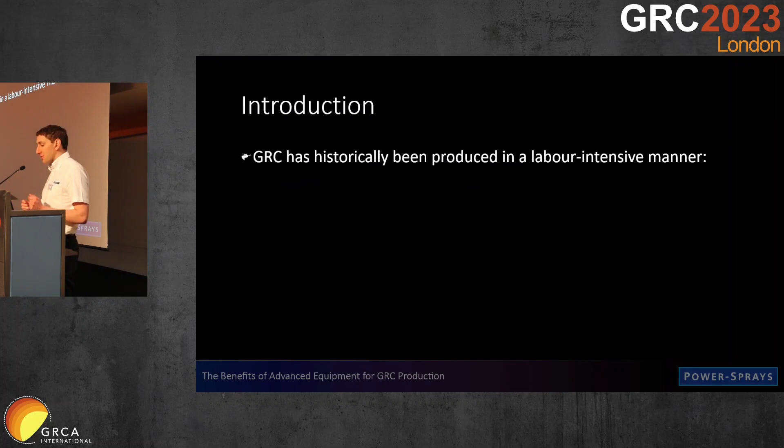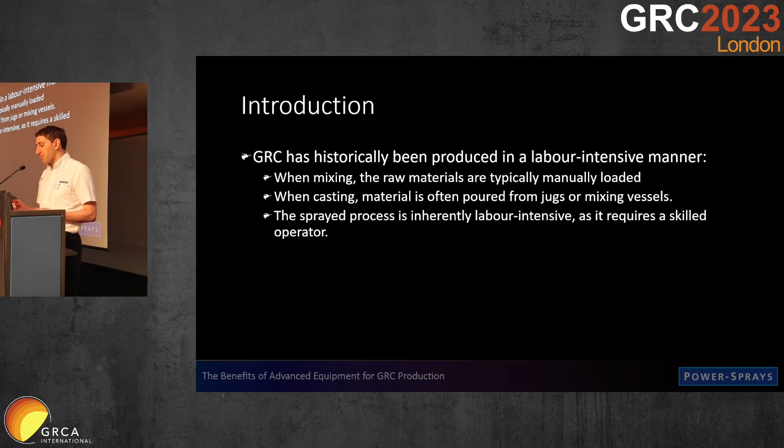So a brief introduction to the presentation. GRC has historically been produced in a fairly labour-intensive manner. When mixing, the raw materials are usually manually loaded. And when casting, the material can be poured from jugs or directly from the mixing vessel. As we know, the sprayed process is inherently labour-intensive, and it requires skilled operators, who in some countries are very expensive and difficult to get hold of.

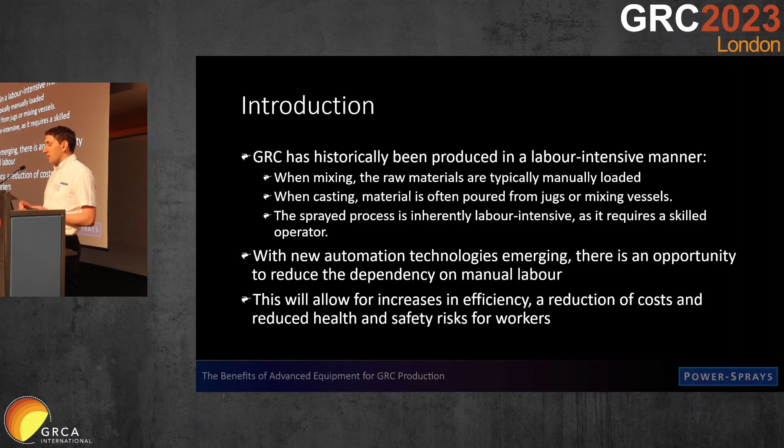But with new automation technologies emerging, there's now an opportunity to reduce the dependency on manual labour. Maybe not immediately, but looking to the future, it's getting better. It's getting better all the time. So this will allow for increases in efficiency, reduction of costs, and also reduced health and safety risks for workers.

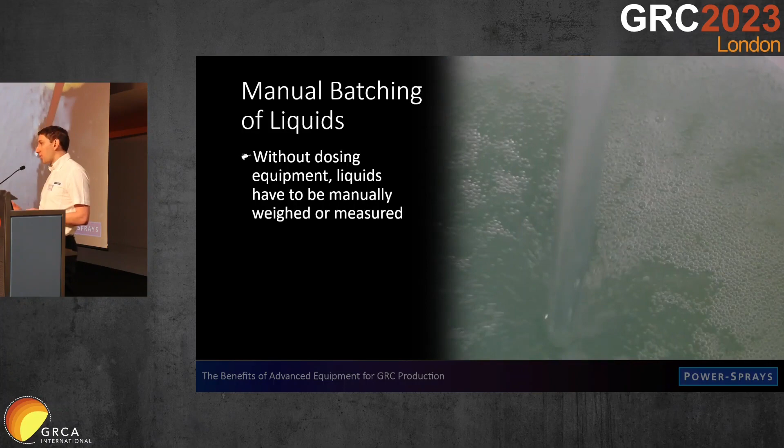So I want to talk about three topics. I'll try and be quick in the presentation. Batching of materials, automated quality control, and automated spray stations. So start with batching of materials. If you're doing it the old-fashioned way, without any dosing equipment, liquids have to be manually weighed or measured in a measuring cylinder or on scales. As you can imagine, this is pretty time-consuming, and more importantly, perhaps, is prone to human error.

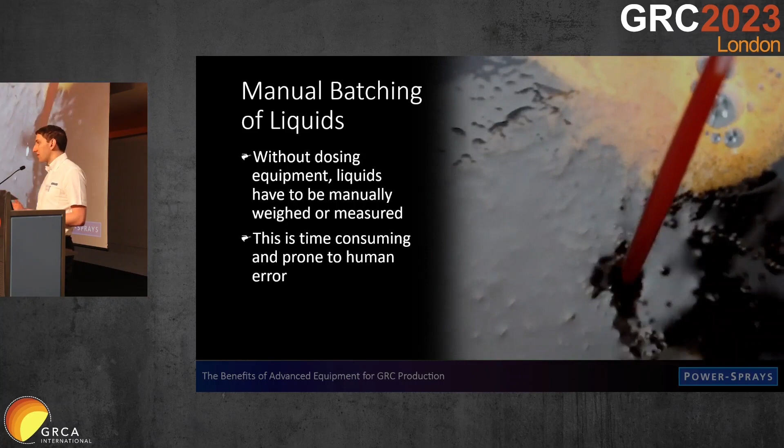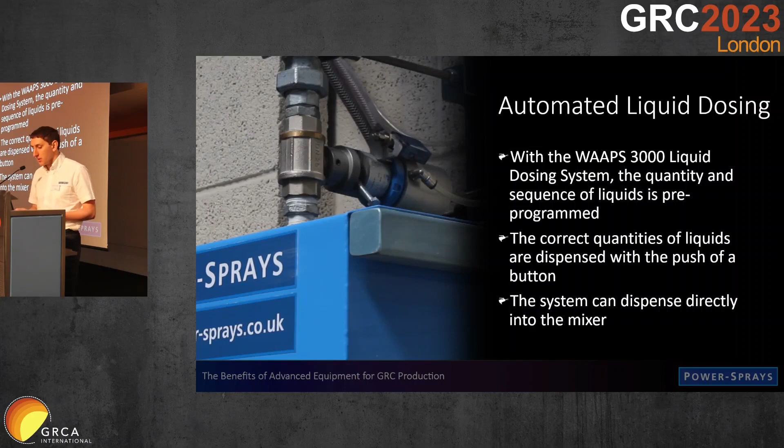So the alternative, automated liquid dosing. With a system such as our WAAPS 3000 dosing system, the quantity and the sequence of the liquids is pre-programmed. So, as you see in the video, you pre-program it with your up to 30 recipes, and with the push of a button, the liquids are dispensed either directly into the mixer or into a bucket. This system also has an automatic mode, where as soon as it's finished discharging the last mix, it will start weighing up the next.

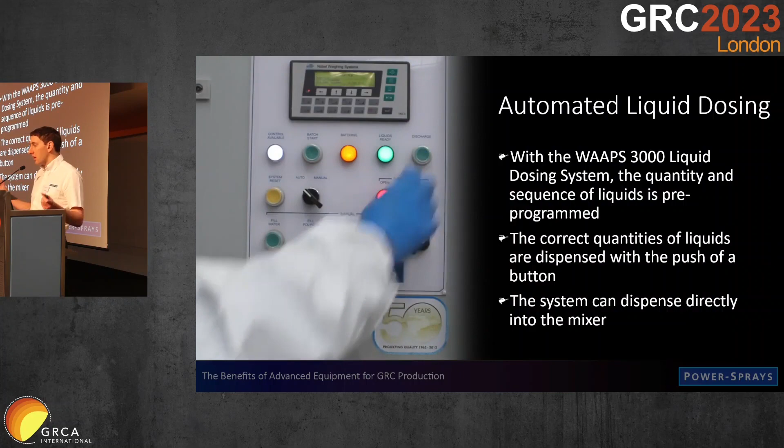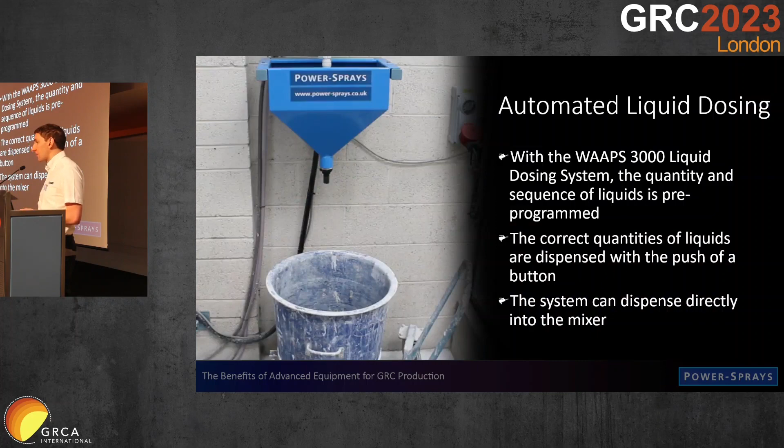So if you're there in a mixer, you hit discharge, you do your mix. When you finish that, giving it to the spray guys, there's already a mix waiting for you. You hit discharge, the liquids are there. So although the actual weighing time is something like 2 minutes for a typical batch of GRC, the mix time is just as long. So it's actually like 10 seconds. You hit discharge, 10 seconds later, you've got all your liquids.

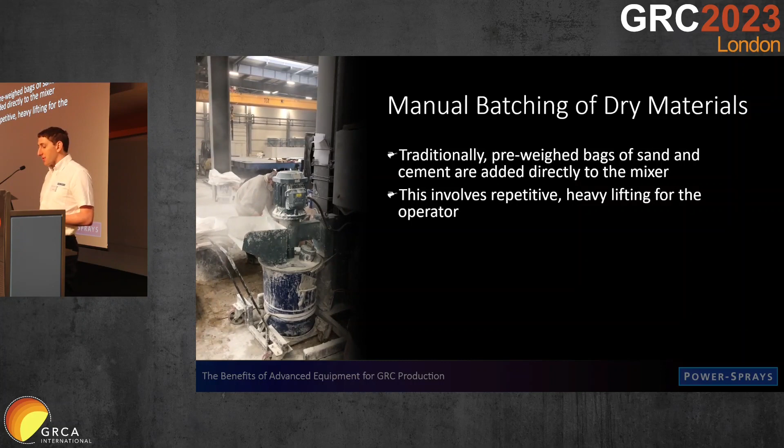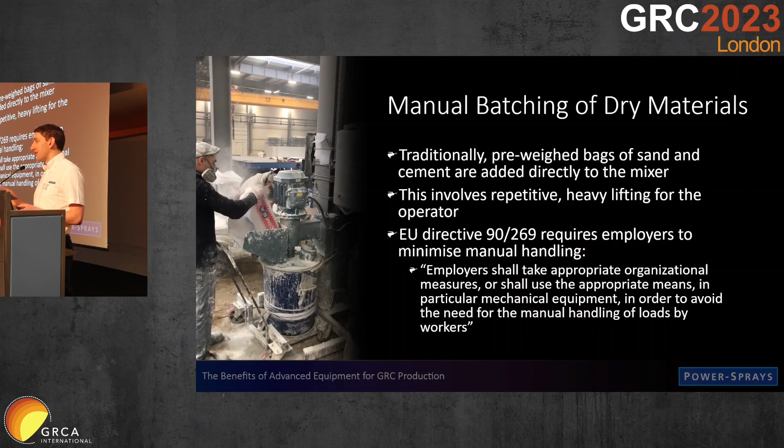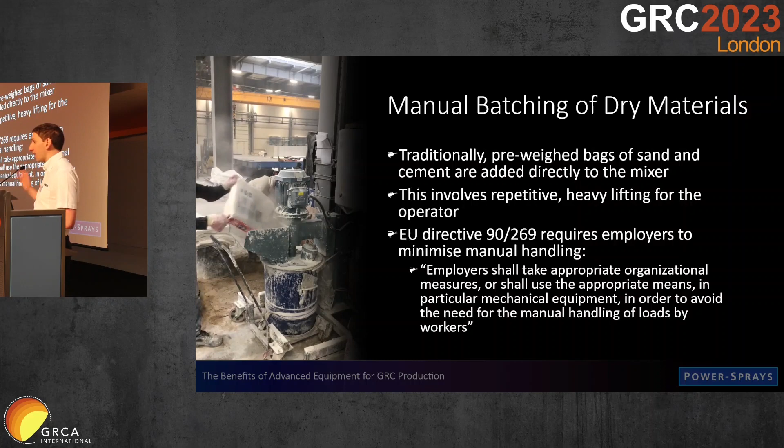So that's liquids. Onto dry materials. Traditionally, again, pre-weighed bags of sand and cement are added directly to the mixer. Obviously, our GRC125 mixer is pretty commonly used by hopefully a lot of you. But it involves repetitive heavy lifting for the operator. And there's an EU directive. I know a lot of you aren't in the EU, including me. But the EU wants us to minimize manual handling. I won't read it out, but the point is, do as little manual handling as possible. That's what they're after. And this is a directive, not something they're going to be prosecuting you over, but these laws are only getting stricter and stricter, and they start in the EU and they spread worldwide.

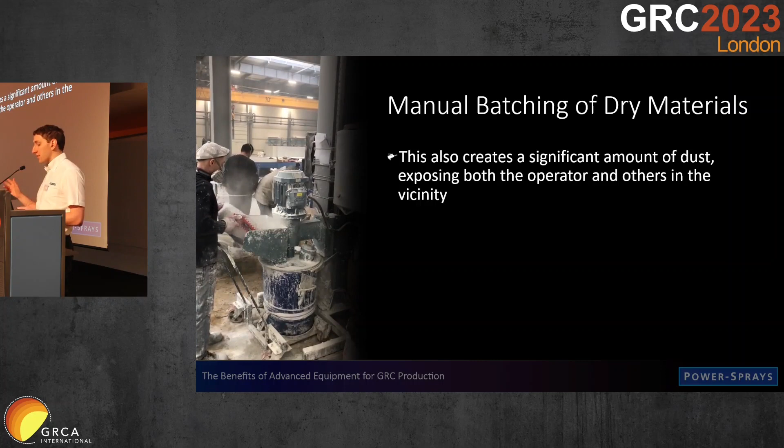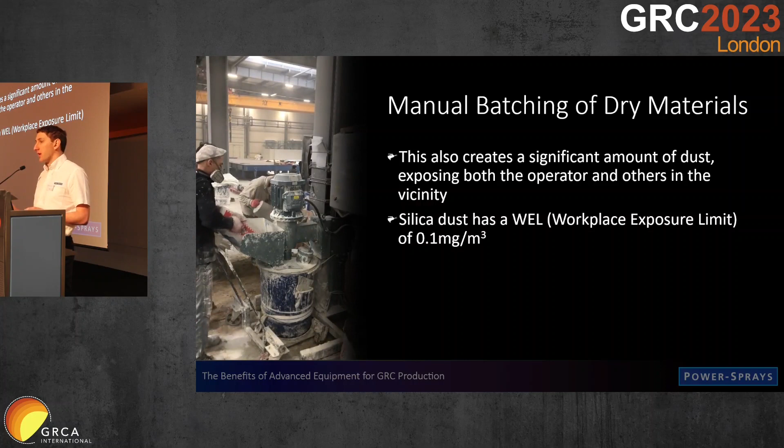The other problem with manual batching of dry materials is, of course, it creates a lot of dust, which exposes both the operator and others in the vicinity. Again, I don't have the references, but laws around respirable silica dust are just getting stricter and stricter. It has a workplace exposure limit of 0.1 milligrams per cubic meter, which means during an 8-hour period, a worker shouldn't inhale more than this much dust. Now, obviously, as you see in this video, it can be managed if they're wearing proper masks. But again, it's the same as the heavy lifting. The laws are only going to get stricter. So it's something to be aware of and to consider.

An additional issue with manual batching of dry materials, not an issue, but a cost, is you have to get all the dry materials right next to the mixer before they can be loaded. So you might have a guy on a forklift spending half his time literally just moving sand and cement backwards and forwards around the factory.

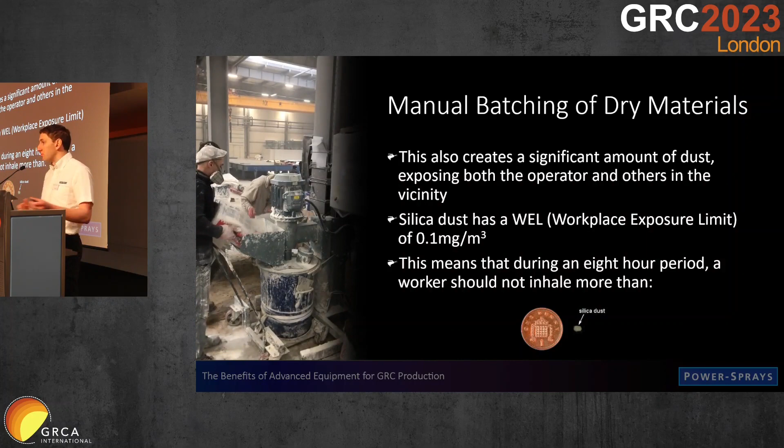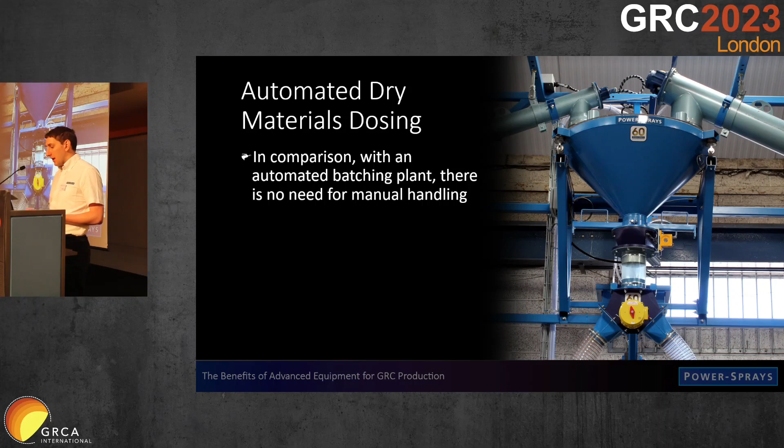So the solution is an automated dry materials system where there's no need for manual handling. In such a system, all the dry materials are loaded via screw conveyors, and the outlets of the conveyors are sealed to the weigh hopper. So I'll briefly just show you on here what each piece is. This here shows a screw conveyor for cement, and it's connected to either a big bag or potentially a hopper, but for cement, a big bag is usually better. This is a screw conveyor for sand. So they're both loaded into this weigh hopper, which is mounted on load cells, connected to the control system.

Similar to the liquid system, the system weighs everything up, and then it gives you a little light to say the materials are ready. When you want to go, this is the valve, the discharge valve for dispensing the materials, and our system controls it so that it opens and closes rapidly, and it mimics the dry materials the way you would do it manually. You don't want 25, 50 kilos of stuff to just dump into the mixer, because it's going to trip the mixer. It's going to require too much torque.

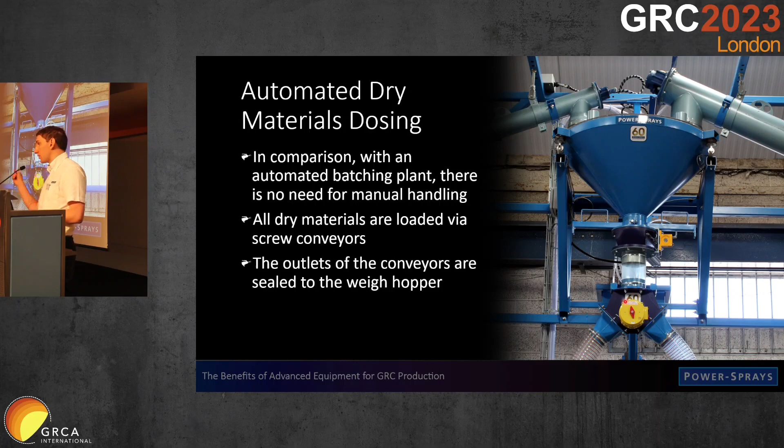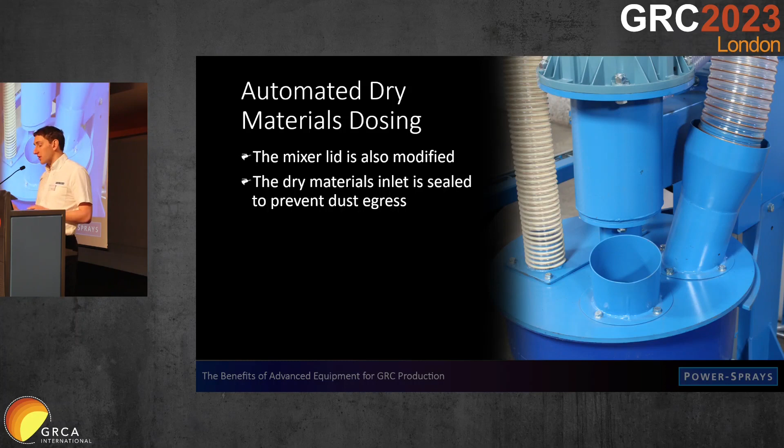And then just below that, we have the diverter valve, so that you can choose whether it goes to mixer 1 or mixer 2. And I'll just show the mixer lid in such a system also needs to be modified. The benefit of this is the dry materials inlet is sealed to prevent dust egress, and it also incorporates a vent tube to just keep the dust all within the system, not allow it to escape.

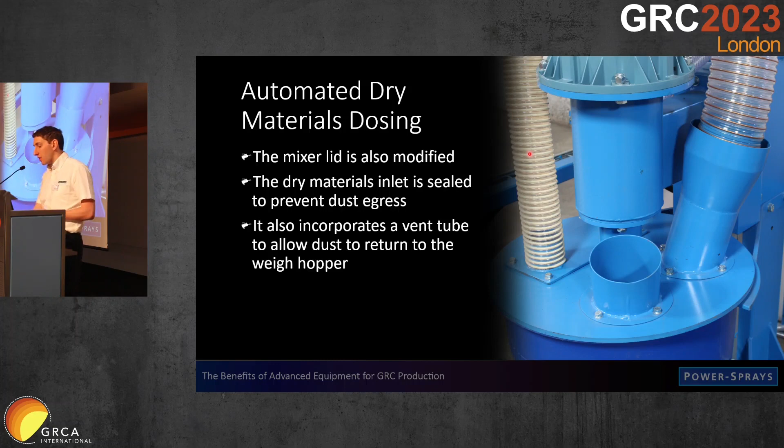Oh, beg your pardon, I've gone too fast. Again, I'll just show you. So this is the inlet for the dry materials. Just behind the shaft here is the inlet for the liquids, and this is the vent tube. So this duct leads back up to the weigh hopper. So any dust that's generated during mixing or during the loading of the mixer, it's got nowhere to go but back into the weigh hopper, so nothing escapes into the environment. This here is just an inspection hatch.

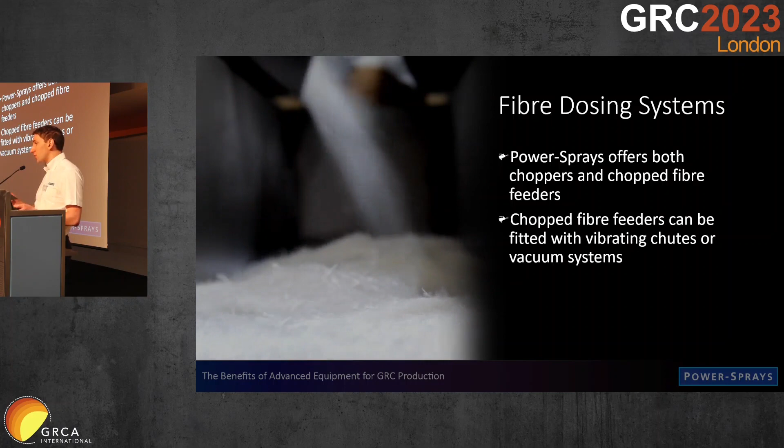So as well as liquids and dry materials, we also offer choppers and chopped fibre feeders. The fibre feeders are probably the most useful, actually, and can be fitted with vibrating chutes or vacuum systems to move the fibre anywhere in the factory within reason. And they can also be integrated into batching plants. We design these systems around glass fibre for obvious reasons, but they can also be used for chopped polypropylene and some other synthetic fibres. And we've got a lot of these now in concrete batching plants.

In particular, polypropylene, I'm not sure how many people are aware of it, it's used in tunnel lining for fire resistance. So HS2, recently we've got a fibre dispenser installed in Avonmouth, actually. They're making tunnel lining. Oh, I should explain for people who aren't British, apologies. So HS2 is our very controversial high-speed rail line. It's going right through the middle of the country. It needs a lot of tunnels to avoid roads and farmland and what have you. And a huge amount of tunnel lining, and it's all got polypropylene in for this fire resistance. So one of our machines is there for that.

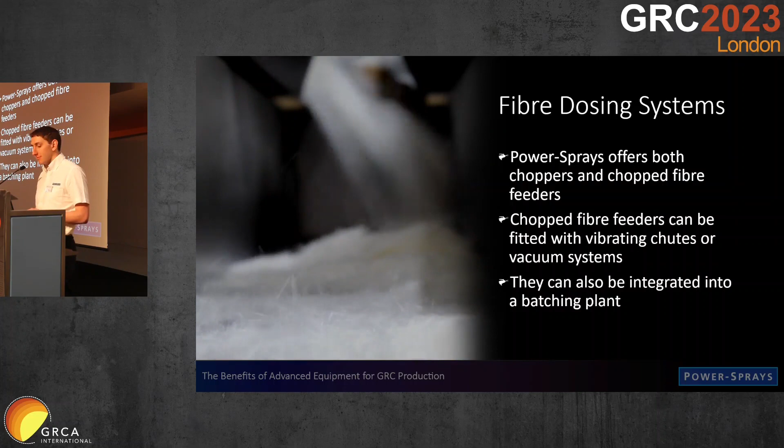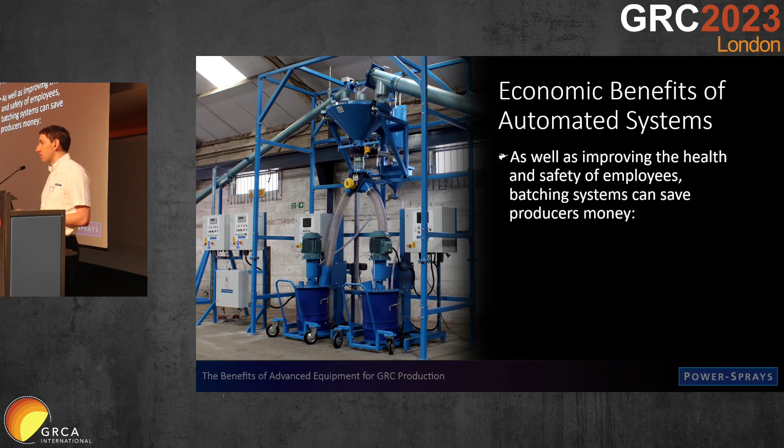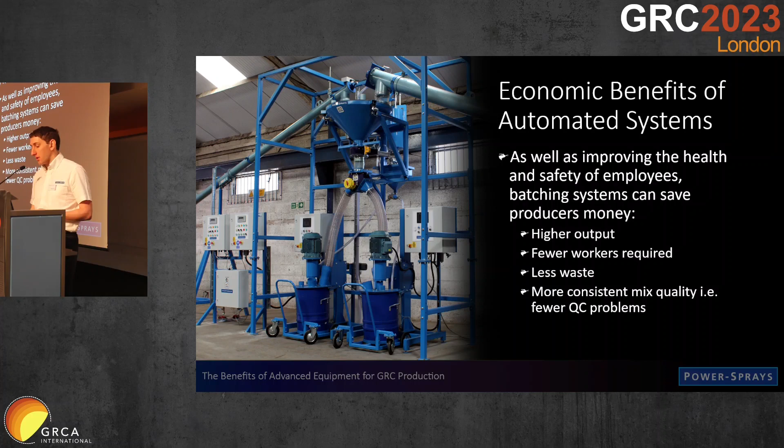So apart from the health and safety benefits and that sort of thing, there are also economic benefits of automated systems. It can save you money. With these types of systems, you'll have a higher output, fewer workers are needed, there's less waste, and there's more consistent mix quality, so fewer quality control issues. We recently installed a batching plant a couple of years ago, and the customer carried out an analysis before and after they had the plant, and they found there was an increase in output of over 40%.

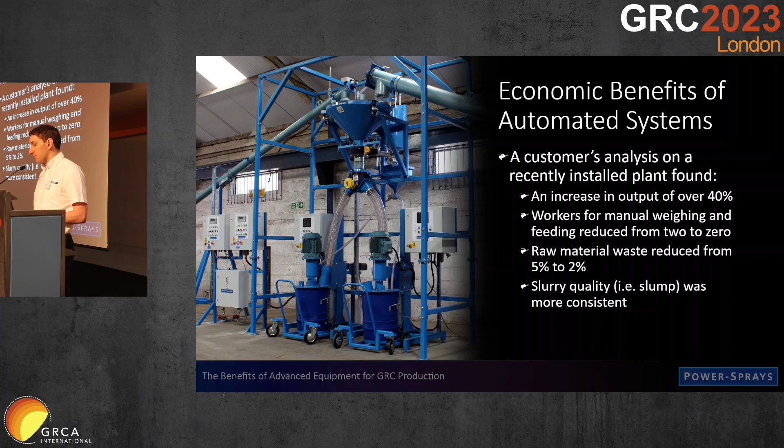The workers they needed for manually weighing and feeding the mixer was reduced from 2 to 0, pretty significant reduction. And the raw material waste was reduced from 5% to 2%. In addition, the slurry quality, as I said, was more consistent, and they seem to think that saved them almost a whole person, having to just check everything all the time. So based on this and our own sort of data that we have from other customers, I've very roughly calculated the payback period for a typical batching plant, although there's no such thing as a typical batching plant.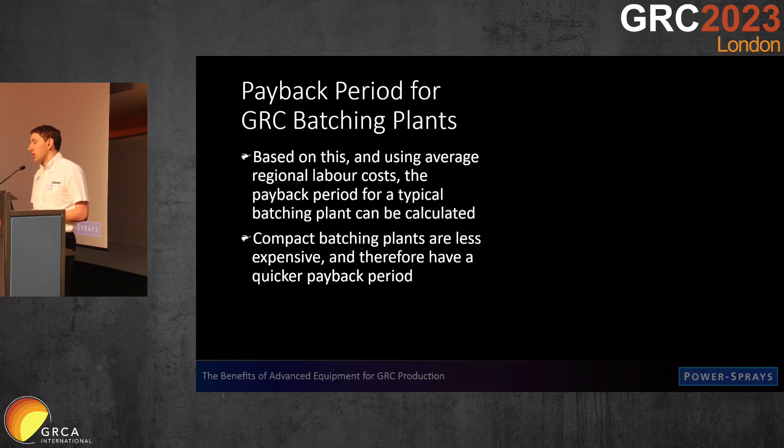So compact batching plants are less expensive and therefore have a quicker payback period. And by compact batching plant, I mean a simple system with all the dry materials being fed from either a big bag dispenser or just a big hopper, and then feeding to our sort of standard mixers. A larger batching plant might be connected to silos, and it would be perhaps feeding bigger mixers or platform-mounted mixers. So the larger batching plants, more expensive, considerably more in some cases, but they can still be a good option if you have the output to justify it.

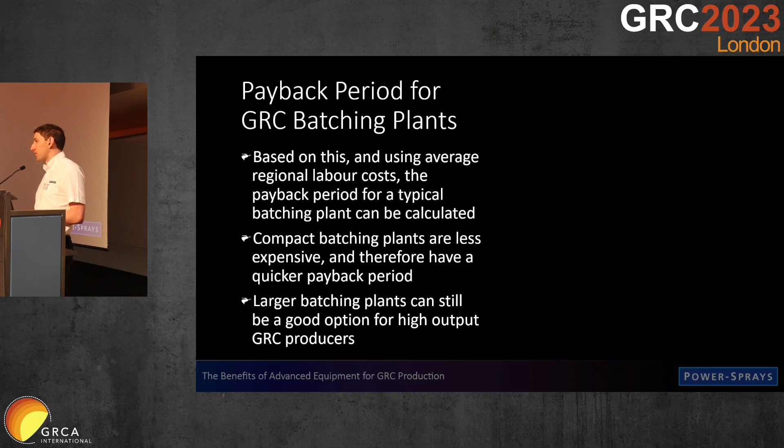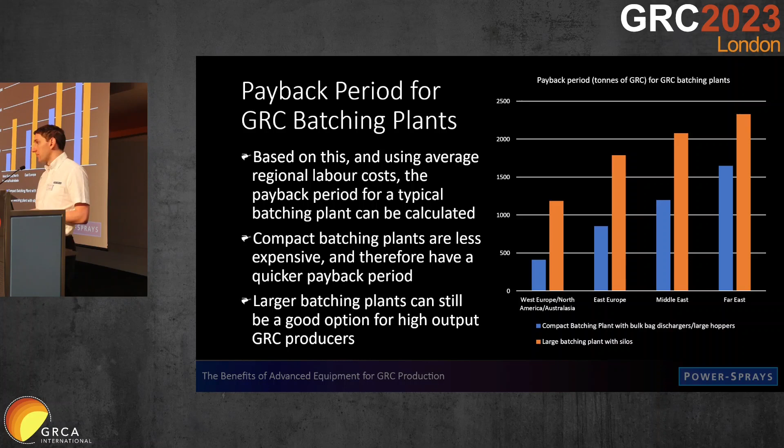But the payback period can be as low as sort of between 500 and 1,000 tonnes of GRC. As you go further east and the labour cost reduces, perhaps it's a little bit harder to justify, but even there, the period can be as low as 1 or 2 years. So it's well worth considering. Okay, on to automated quality control.

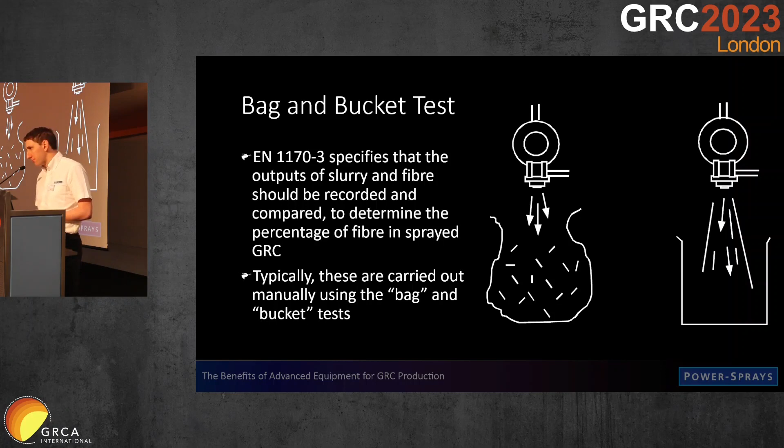So the European standard specifies that you've got to check the output of the slurry and the fibre when you're spraying GRC, and this is typically done at the beginning of a shift or beginning of the day, using the bag and bucket tests that we all know and love. Don't know. So it's a bit of a nuisance, as we know.

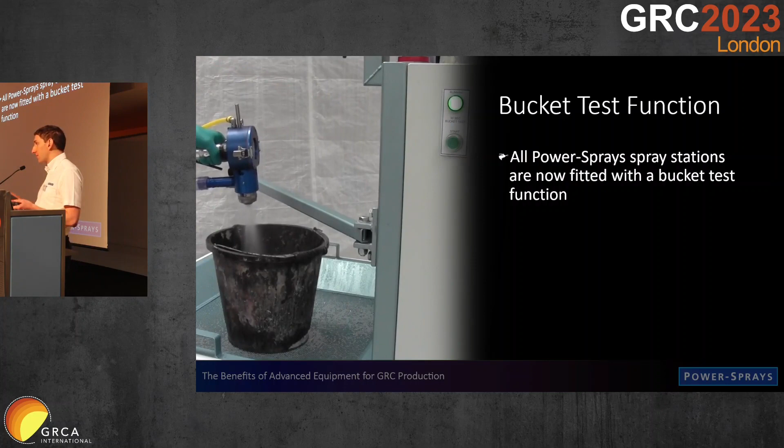So to help a little bit, all our spray stations now are fitted with a bucket test function. This is very simple. All it does is illuminate an LED for 30 seconds. So it's not life-changing, but you still have to perform the test manually. But it's a little bit helpful instead of having a guy with a watch going start, stop. There's less chance of error.

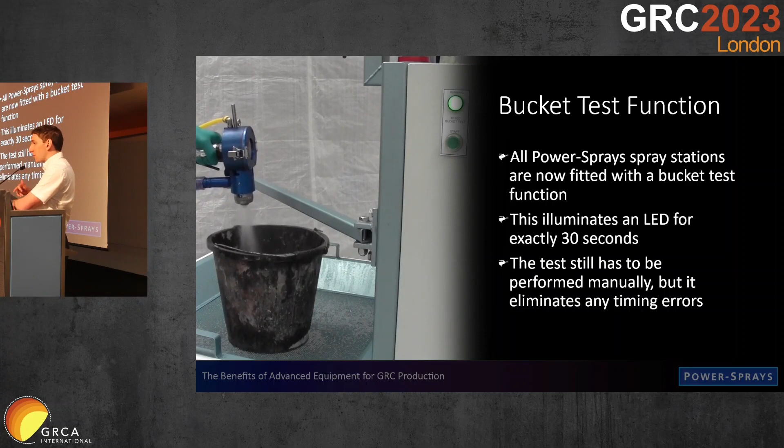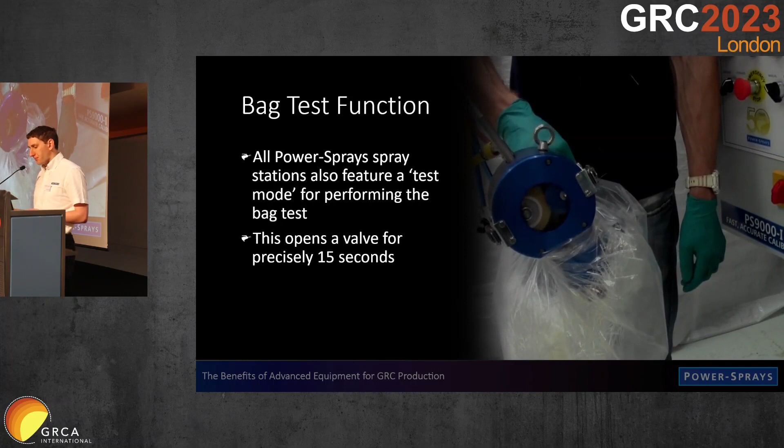More usefully is the bag test function. Again, all our machines have this now. And this opens a valve leading to the air motor for exactly 15 seconds. And this is really useful. It gives consistent, accurate results for the bag test. There's no chance of human error.

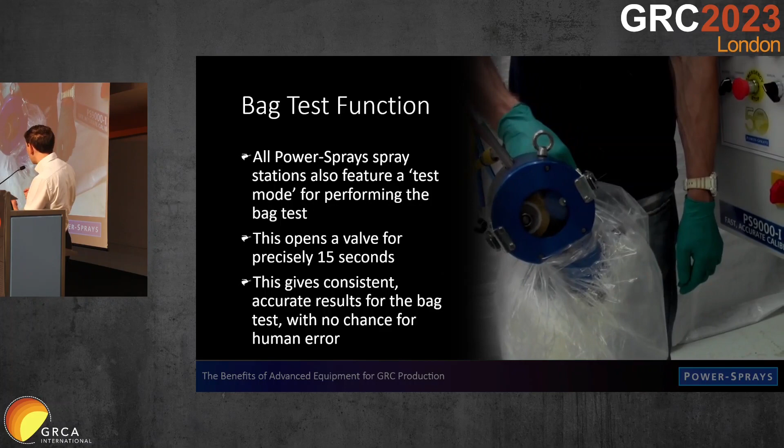I'll just show the whole video now. You'll see Marcus is already holding the trigger as he presses the button. The button opens the valve for exactly 15 seconds, and it closes the valve without having to do anything.

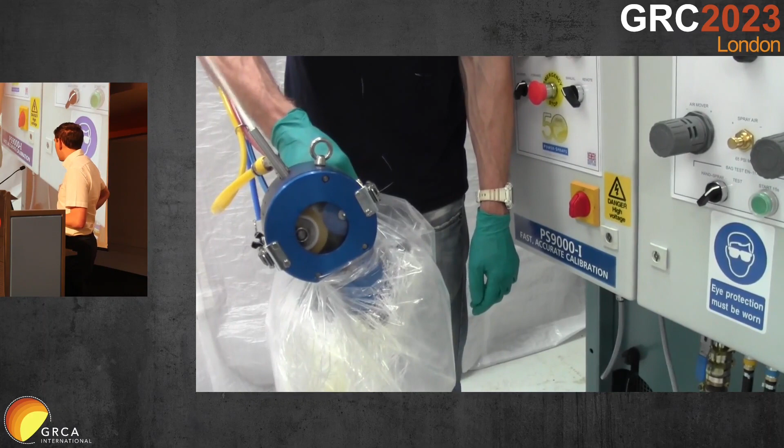I had to cut the video off there just before Marcus lifts his arm up and shows off his belly.

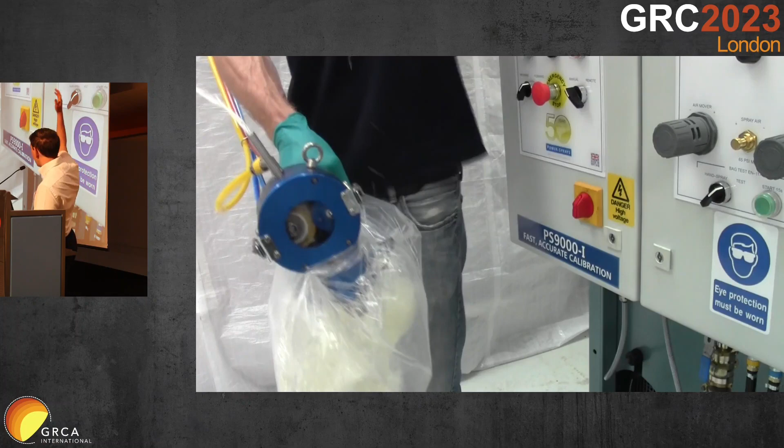So those are great, they're pretty useful, but they still have to be done manually. They take time. And most importantly, they can only be done when production is not ongoing. As I said, normally you do it at the beginning of the shift. But that doesn't really give you much opportunity to check during the day. Outputs can change during the day. Humidity, temperature.

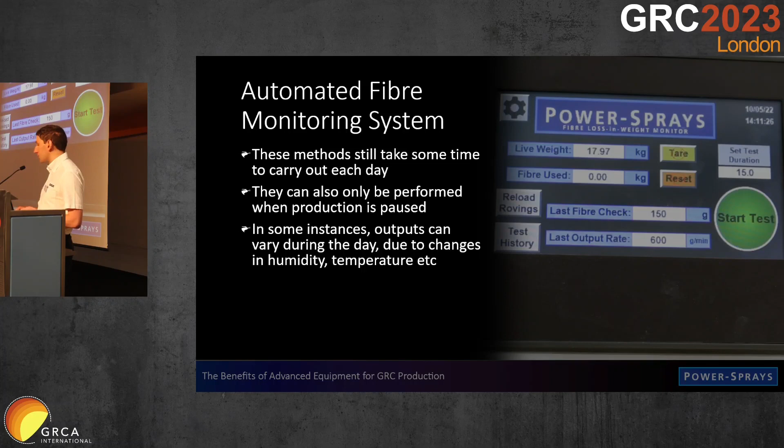A big one we find is you start at the beginning of the day before a lot of people are in and working. Everything seems fine. During the day, somebody starts using an air tool or several air tools, and if you haven't got plenty of capacity in your air system, that's going to affect the air delivery to your spray station, and the output might change. So we've developed a system that gives you a live reading of the output on demand.

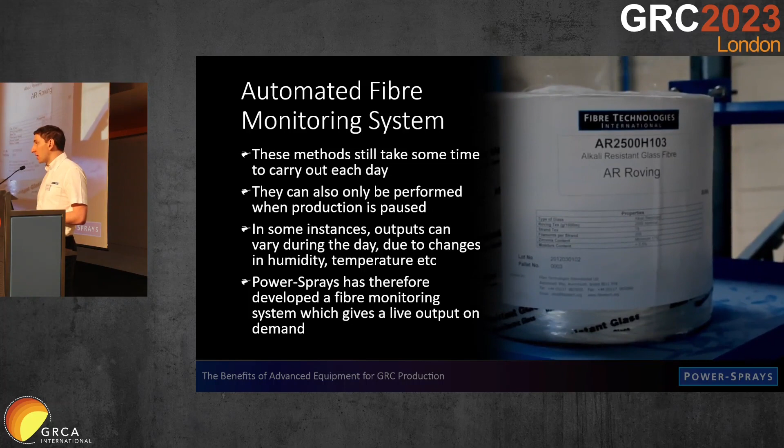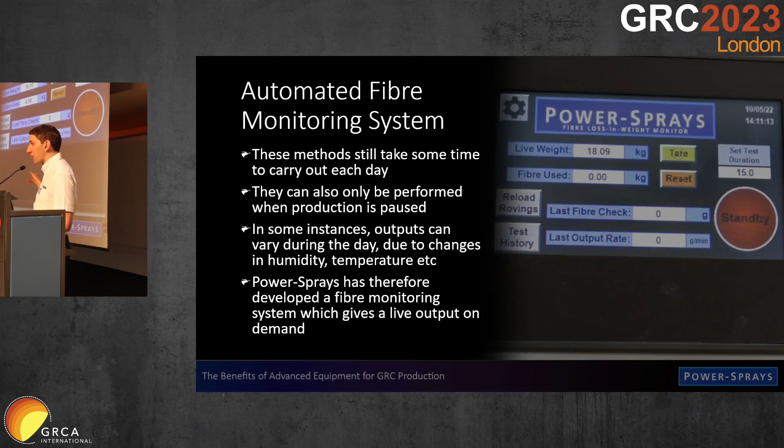We've not quite perfected it, but it's almost ready. We've got a demo unit here, which Marcus can demonstrate at lunchtime. So I'll show this video again. As the video starts, the fibre is already being chopped. So it's as if it was a real production. You can just go and do this test. You don't even have to tell the spray guy you're doing it. He's chopping away, you start the machine, and it'll record how much fibre there is.

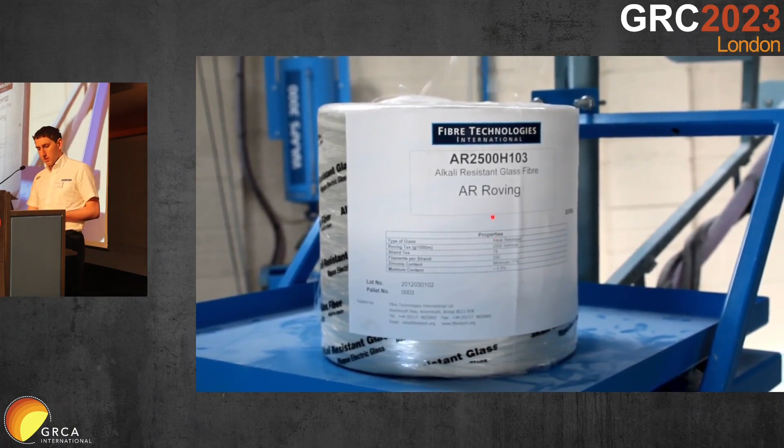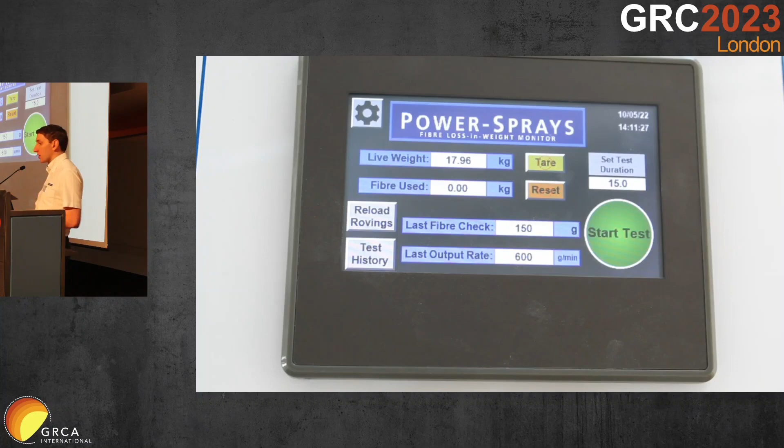So you hit start there. You see the live weight of the roving shown here, and it's running the test for 15 seconds. There we go, 15 seconds is up, and that was the quantity of fibre used, and it gives you the output in grams per minute. You can go on here as well and see all your most recent results. The layout shown here is an older one. We've since changed it, but you get the idea. You can see the new version on our demo unit.

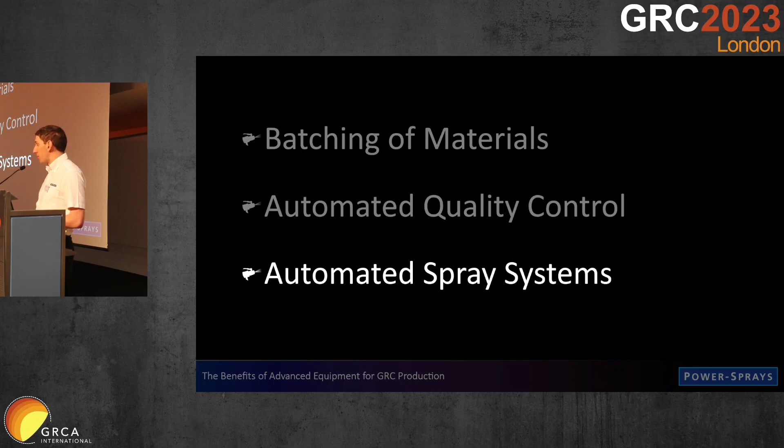So finally, and very briefly, as the session is looking to the future, I'll talk about automated spray systems and how they could work. So the robots are coming, but don't be afraid because they look like this. So as you've seen yesterday, we've had a few presentations already on this. There have been huge advances in robotic systems. And everyone's always wanted to use robots. It's sort of the holy grail of the GRC industry, I think, to get rid of all the people, just use robots. That'd be nice.

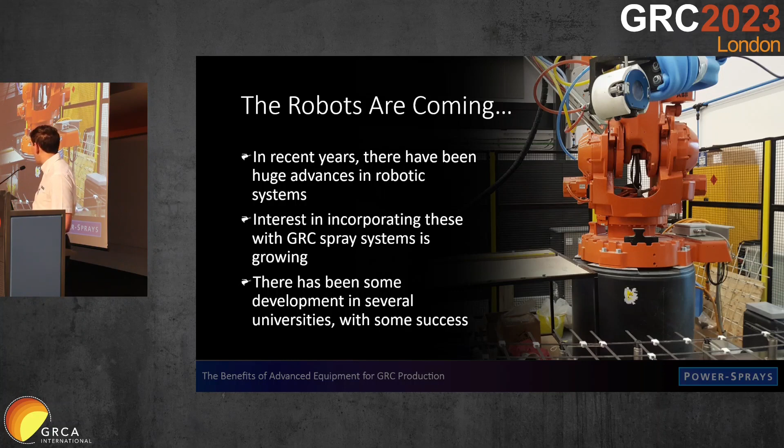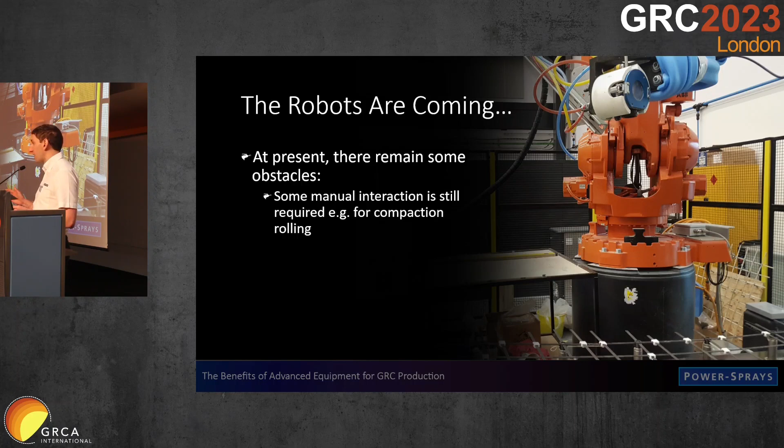And as I said, there's been some development in universities you've seen yesterday, and I think a presentation later today. But there are some obstacles. Some manual interaction is still required. I don't think anybody can say that a robot can use a spring compaction roller. In addition, no cement batch to batch is perfect and is exactly the same. Same with sand. You know, there's always something that needs a little bit of thinking, let's call it.

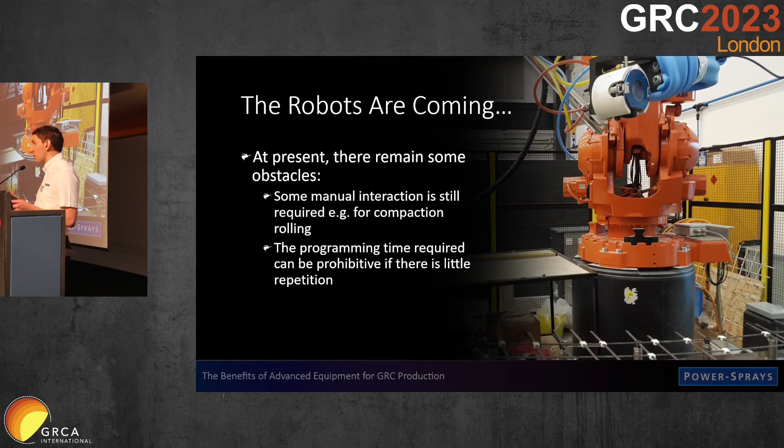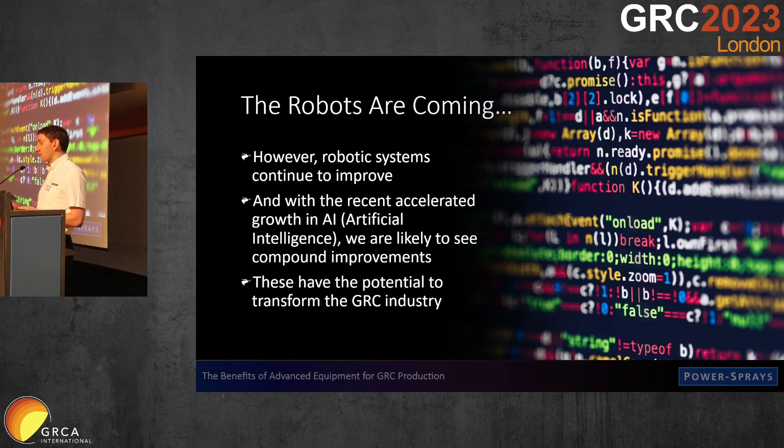In addition, if there's a lot of repetition, the programming time could be worthwhile. But how many projects are there where there's the odd panel, a one-off, or only a couple of them, and justifying the programming time for that, at the moment, I don't think it's worth it. But they continue to improve, and with recent accelerated growth in AI, ChatGPT, that sort of thing, I think there will be some rapid improvements in the coming years. If a robot could look at a mold and say, "Oh, this is how I'll do it," it's a different equation. And these sort of technologies have the potential to transform our industry.

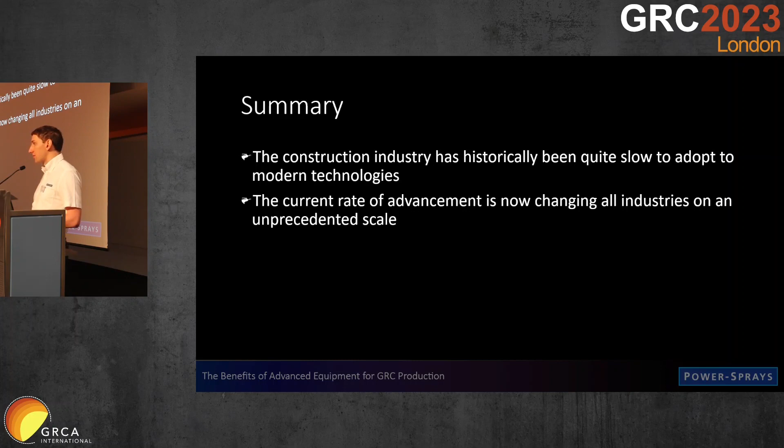So, in summary, the construction industry historically has been pretty slow to adapt to modern technologies, but the current rate of advancement is changing all industries on an unprecedented scale. And we, as a GRC industry, have to start taking advantage of these technologies in order to remain competitive.